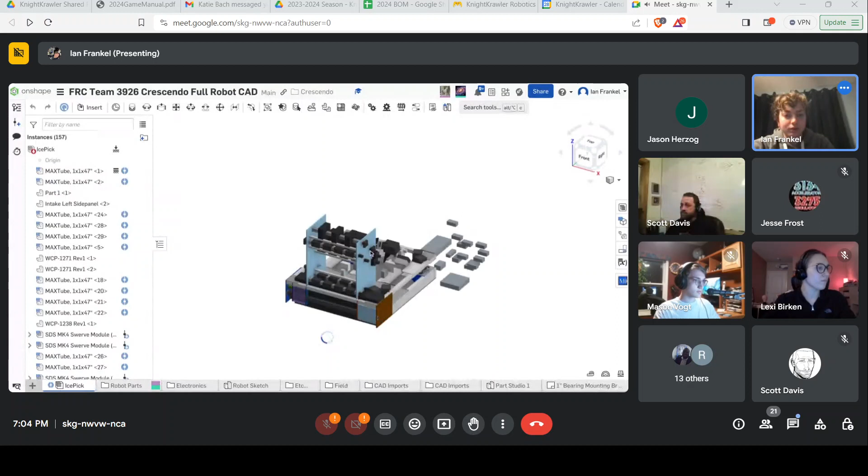that, which is unfortunate. So, Ian, we had the same issue last year, and we talked to Rev about it. And I was very clear that they should make that very clear on their pages, and clearly they have not. So I'll take that up with them again. But what we ended up doing this year is that we made sure to only use the top holes or the side holes. Yeah, that's what we're planning to do in future seasons, but we already bought theirs, and West Coast Products is out of stock for now, so we'll be using

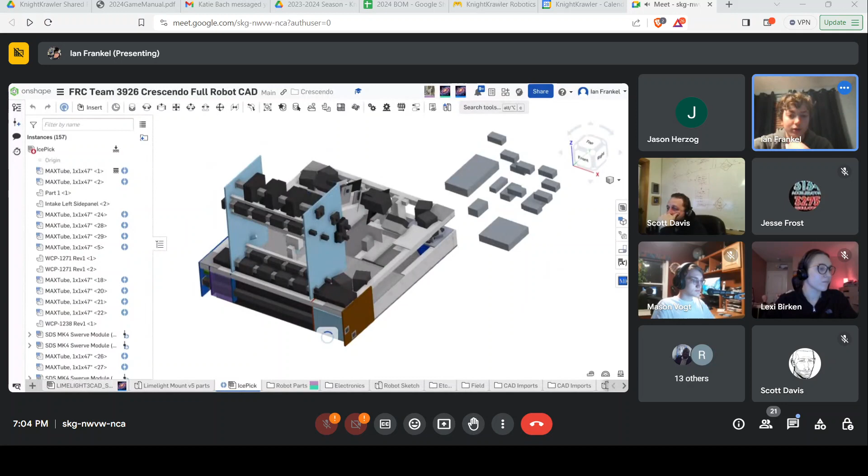them. If the Onshape file decides to load, it looks like people are looking at placing electronics in it right now based on those blocks on the side. It's kind of similar to the Unqualified Quokkas robot in 3 days, but with the Grasshoppers style intake that goes under the bumper but still has a full width. And we chose that because we like that the arm could have an adjustable angle for shooting, and then also being able to get the amp. Taking its time loading.

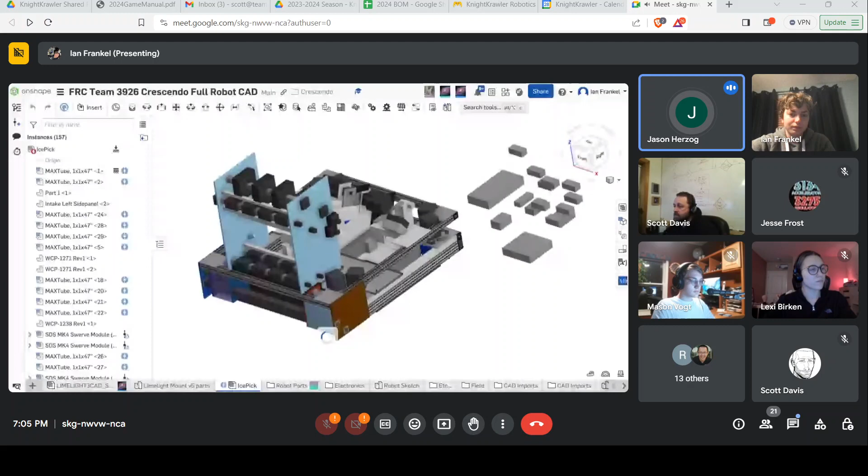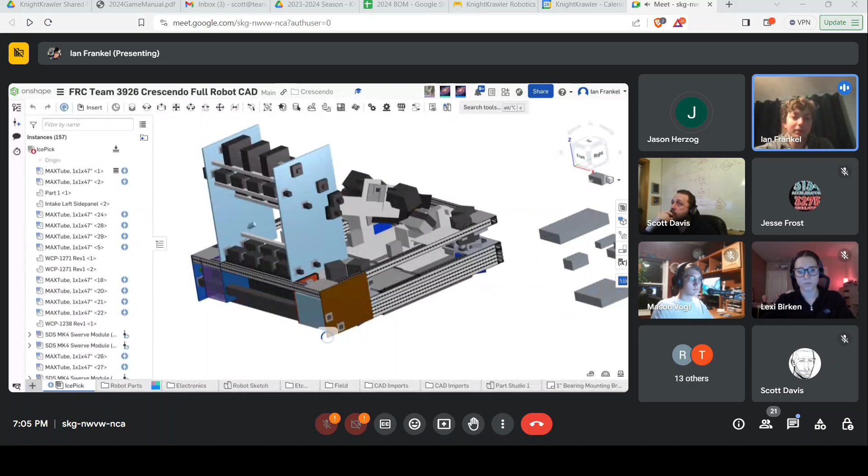What kind of Swerve modules do you guys have, Ian? We're using Mark IVs. We are planning to switch to Mark 4is, but then the wait time for them got really high. And we are probably going to be stuck on level 1s for the season because the gearing was supposed to come back in stock this week, and then they got pushed back by 2 weeks, and then we emailed them, and they're like, we don't actually know if it's coming back in stock, so that's unfortunate.

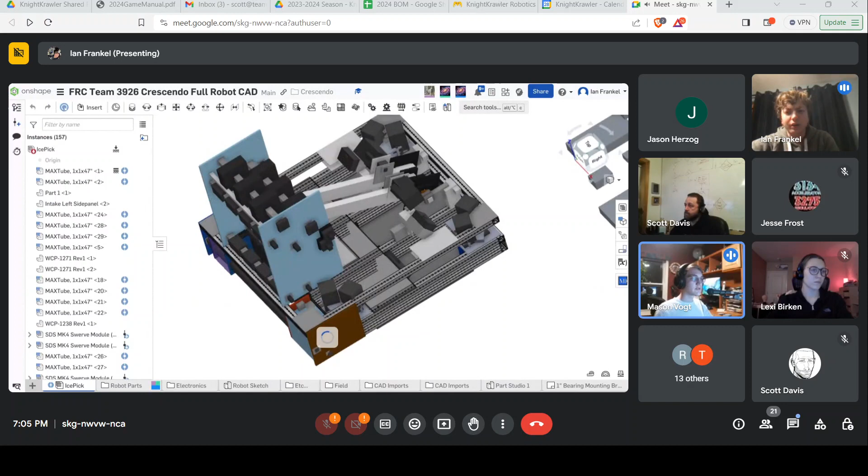Right. Are the pinion conversion kits still in stock? Because that might be an option to gear it up a little bit higher. I think the pinion conversion kits are only for Mark 4is, correct? Are they also available for Mark IVs? I think it's just the Mark 4is.

Okay. Yeah. So since we had this problem last year, I'll just go through what we did this year quickly. So Ian's got the tubes for the frame butted up against each other in their models. So that's what we did last year, and then we put end caps in the end of the tubes, and we bolted the frame together and then attached the Swerve modules, and then proceeded to have to slot out and oversize the holes in the tubing for a good 3 practices while we went back and forth trying to get everything to fit, and it was a nightmare.

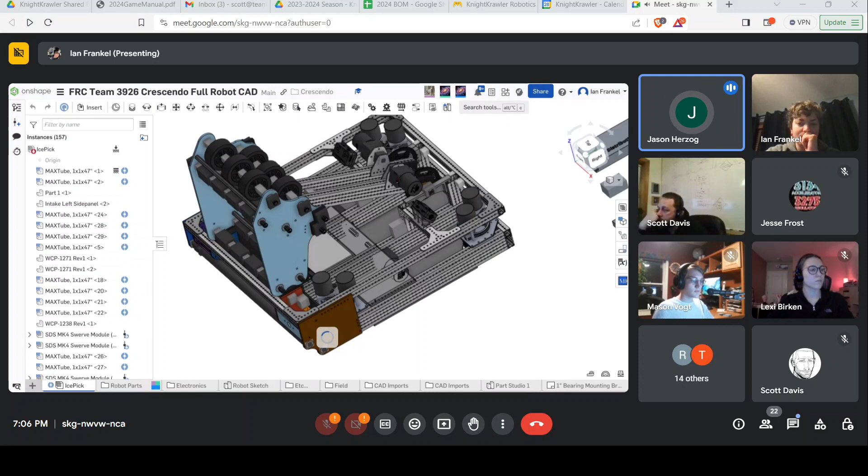And so the holes on the side of the tube were up to a hair over 1/16 of an inch off from the holes on the top of the tube. So that created quite a bit of an issue for us. So this year what we did is the tubes are mounted to the Swerve modules, and then the corners are filled with 3D printed pieces that go into both tubes. So we're not relying on the holes to get those 3D printed pieces into place.

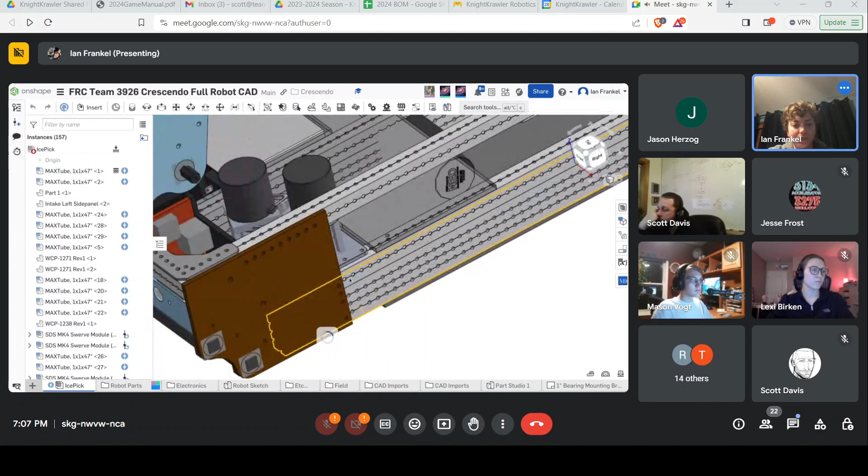Yeah, the biggest place we're running into issues right now is with our under the bumper intake area right here, just because you have the stacked frame plus the intake. So we'll see how that goes, but I think we have some custom gussets we're planning to machine because we were able to find some consistency, but not too much between our tubes.

And trying to make this not... Onshape's just not being. It doesn't like doing Onshape with sharing my screen and camera probably, so I won't be able to actuate the arm. But,

And you guys said that this is the Rev box, is that right? Yeah, this is the Rev. I don't know that any suppliers guarantee the alignment of the holes on different sides. We looked at the drawings between Rev and West Coast Products. West Coast Products gives a distance from the end for both dimensions of their tubing, versus Rev, sneakily in their dimensions, only gives a guaranteed half-inch from the end for one of the two holes and not both of them. And so you're not actually guaranteed to have them align, which is unfortunate.

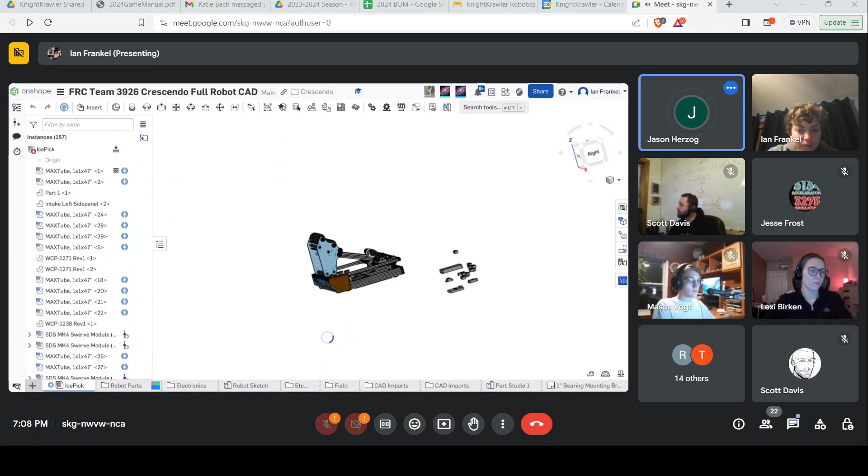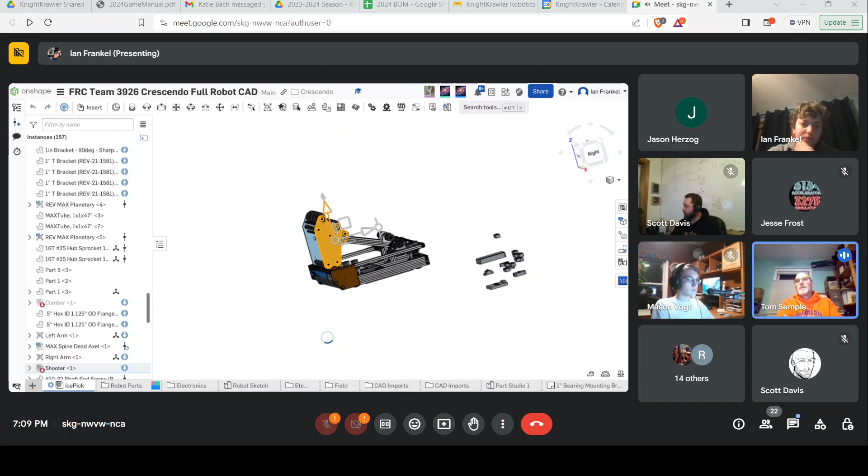Yeah. The other thing to keep in mind is that the drawings that vendors share are not production drawings that they use to make their parts. Right? So they're almost never toleranced. And so just keep in mind that there will be some variation. It might be minor on West Coast, but there will be slight variation on how far they are from the end. Just to jump in, so Jason, you said plus or minus 30, off by 60 thousandths roughly. You said a 1/16 of an inch, right? Yep. Huh, that's interesting. I wonder what their process is and what their tolerance really is supposed to be.

Yeah. So yeah, Ian, one solution to those side plates is to match drill them. Right. So get the first bolt in and then match drill. So tape it on, clamp it on, and then come through and drill them to match. Right. And your two side plates will be different, your right and your left one, but they'll line up. And everything will line up. Yeah, I think we have some plans to mitigate it. But it's something that we didn't take into account with our design, and now we're getting set back a little bit by it. Yeah, or move up to like an ASME loose fit, which is a pretty loose fit around your bolt.

I have a different question if we're ready to move on. Several people on my team really want to paint some polycarbonate. Has anyone painted polycarbonate before? And what success or failures have people had? And how do I make sure that John's not mad at me when we leave little paint chips all over the field? I'd be really concerned about that. Well, it's not me that's going to be mad at you, Jason. It's going to be the field supervisor. I know, but you're not even going to let it get there, probably.

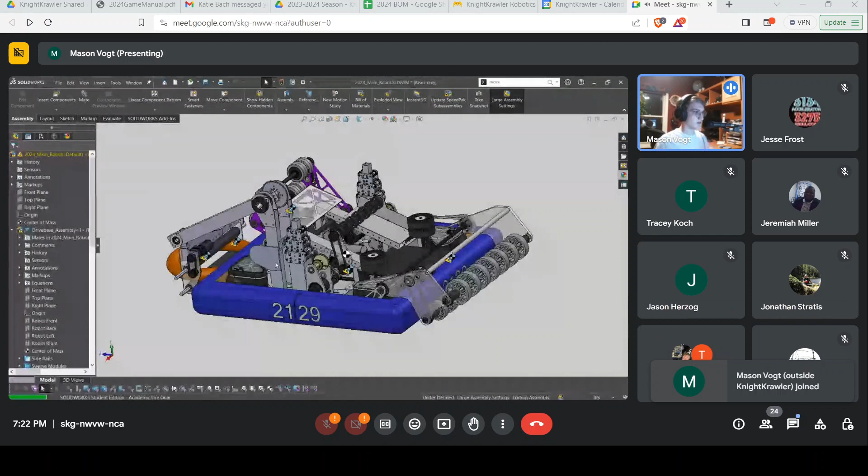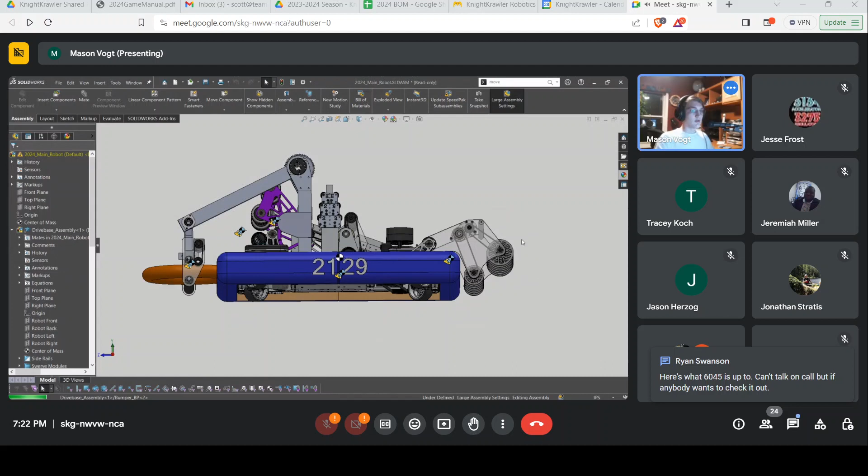So here's what we've got so far. It's kind of chaotic, but we've got our over-the-bumper intake at the back of our robot. Mark IVs. We're doing Kraken drive motor, Falcon turn motor, and then we have L3s with the conversion kit to make them even faster. Just trying to maximize speed. We're running two climber setups, using the West Coast Products blocks to save a lot of development time there, and then custom gearboxes.

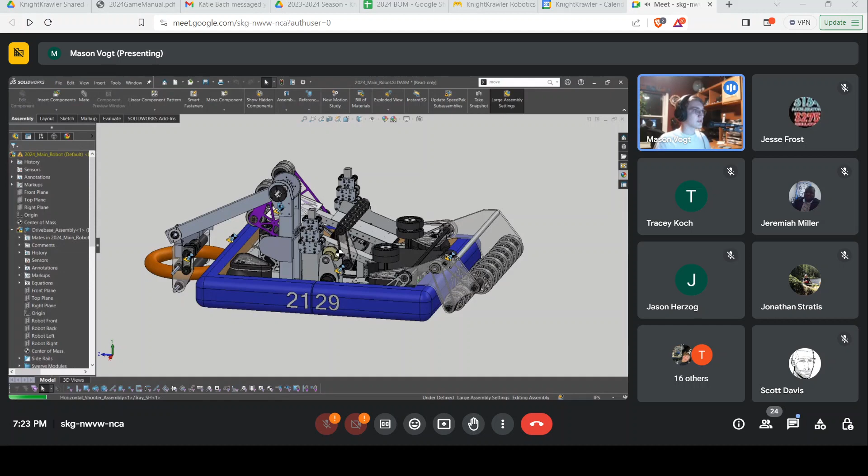In terms of indexing, we have these two wheels here that will spin opposite each other, again a lot like a 2022 robot, and funnel the note in from there. It should then be stored underneath this roller, which will spit it into our shooter. We might replace that with pneumatics, but it's probably going to stick as a roller. It might get bigger as well. The shooter is pretty standard Colson wheels, offset. Did a bunch of prototyping on that.

And then to actuate that up and down, we have a giant 10 DP gear at the bottom, which we're 3D printing, and then a corresponding one driven by a Falcon. So that'll allow us to get the full range of motion to shoot from pretty much anywhere we want to.

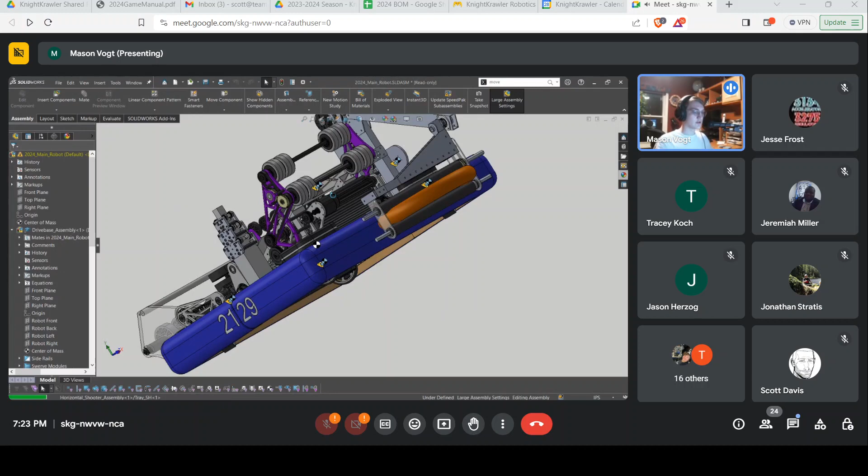The elephant in the room is the arm that we have, which I said we weren't doing an arm, but we kind of are. This is our amp and trap mechanism. So it's a virtual 4-bar and allows us to pick up from the floor on the opposite side or from the chute, and then score both amp and trap pretty quickly. And so that'll stow on the opposite side of our robot with the end effector upward here. I think that's about it.

In terms of what we've actually machined so far, our drivetrain's completely done. Climbers are done. We'll probably be driving around with most of our robot done by the end of the week. We just have to get some CNC time in pretty much.

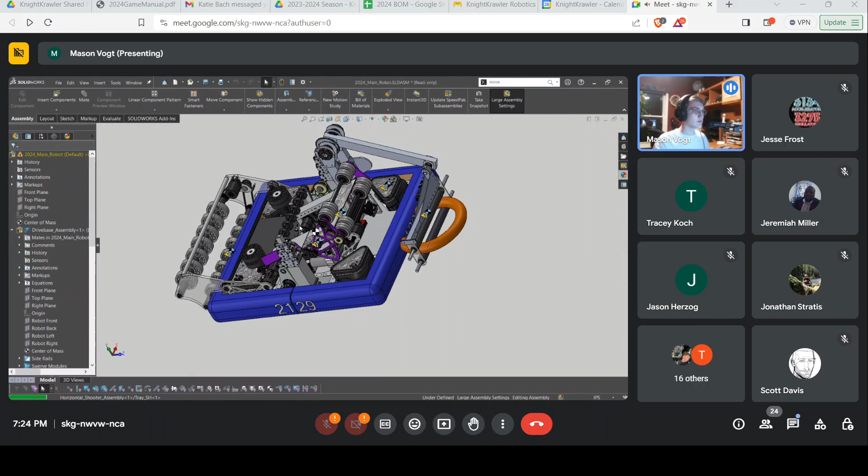The other thing that we've been talking about a lot was pneumatics or not to do pneumatics, basically. We have room for a compressor in here, but we'd still have to find room for a pneumatic air tank. But the main thing is we'd be using it on our climbers. The friction brakes are out of stock from West Coast Products right now, and especially because of that 5 seconds you have to stay up at the end of the match, it might be kind of tricky with just brake mode. But we're just going to test that, and that'll basically decide if we're going to do pneumatics or not.

We're already deploying our intake with a motor geared 50:1, so that probably would not be replaced with pneumatics. But where we might use pneumatics is to index the notes into our shooter, because we found that a follow-through is very important to get an accurate shot. So we could mount pneumatics basically underneath and have a flap pull the note into the shooter. But that's all still to be determined once we start getting the final one machined.

Are there any questions? Hey, Mason. Yeah. So how are you going to account for, and that's a question for everybody in the room, when a note falls in there, and how do you get it out? Yeah, that's a good question. The main thing is this is not really done yet. There's a big flap that comes down from a little bit before these rollers to this bar on our intake, which has one joint in it and is held with springs, so that when we pull the intake up, that goes up as well.

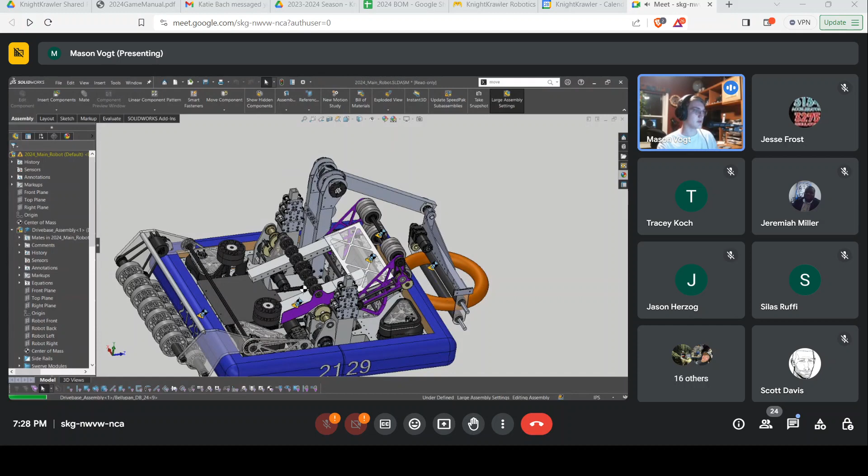Well, if there's not any more questions, that's pretty much what we've been working on. We only have like 2 CAD people, so it's been a journey.

Hey, Ian. Yeah. All right. What do you have for drive motors? For drive motors, we plan on using Vortexes, and then for turn motors, we'll be using NEOs. Right now, it's just 8 NEOs, though. I've got something of an idea if you want to work on gear ratio. I'll share it with you when I've got the CAD done. Okay. This will be interesting.

Have you had any problems with your Vortexes? I know some people are having some CAN issues and some other stuff. Yeah, so we've actually had wonderful experiences with our Vortexes so far, especially in prototyping. When we were prototyping our shooters, it was really nice to just stick a piece of hex shaft through the motor, wire it to the Rio, and be done. It was almost as simple as hooking up a drill, which was super nice, especially for that one-to-one driving.

We haven't tested them with the 8mm shafts yet, just because we haven't had really a need to. Although we did some run-out testing, mainly because someone on the team, me, did not throw out or mark the bad shafts when we got the new shafts. And so they got mixed together, and then I had to sort them out. The run-out was really bad on the bad shafts, but on the new shafts it seems to be fixed, which is nice that they actually work.